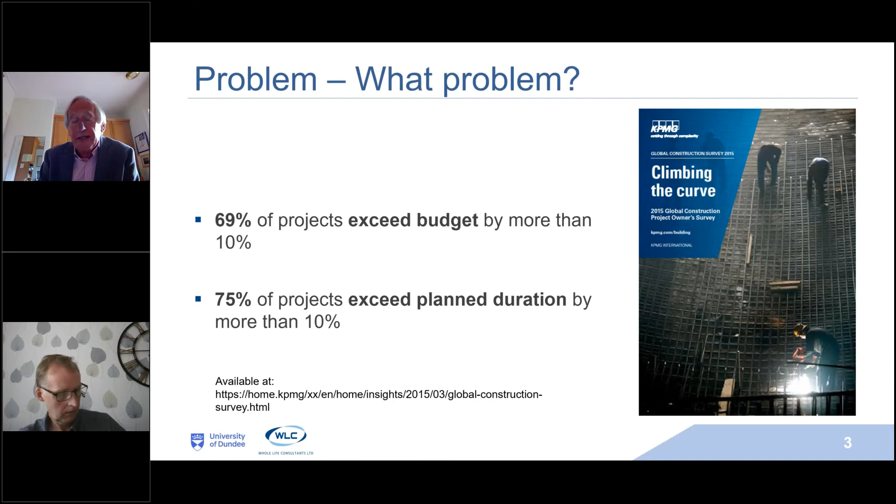Productivity has always been an issue for the construction industry, and we did some work a couple of years ago for CITB looking at productivity across a wide range of perspectives. But the one in particular that's relevant today is this graph, which shows how productivity in the construction industry, measured in terms of output, has increased over the past 30 or so years, and that average increase is 0.5% per annum. That is a tiny, tiny increase.

If we were to measure that growth in terms of GVA rather than output, then that would go up to 1% per annum. But compared with other industries, our productivity growth has been very, very small indeed. And please note that when I talk about productivity, I mean output divided by labour hours input. So it's output over input, and it's labour hours particularly that we're interested in. So a very concerning performance for government and indeed for the industry.

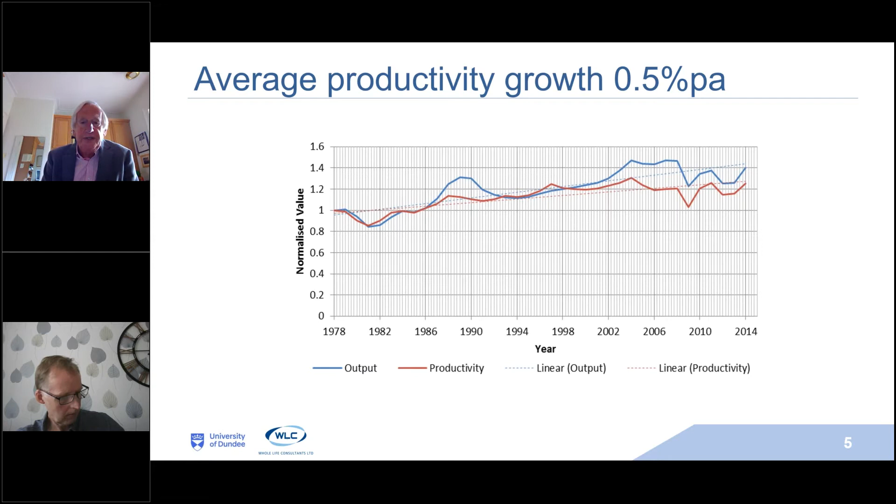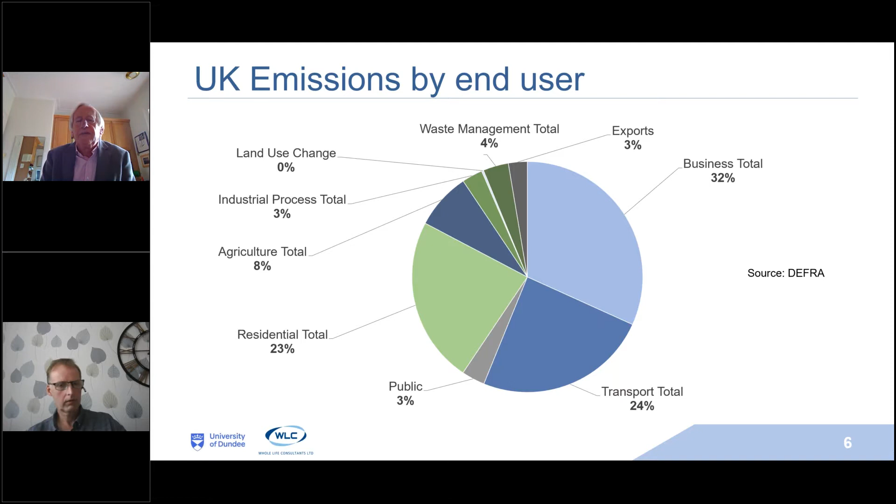And of course, as far as the environment is concerned, we contribute enormously to CO2 emissions, to greenhouse gas emissions, through the buildings that we build, through the transport networks that we build, through the energy that we encourage people to use in manufacture and living. So we have a great responsibility to the environment as well as to the economy.

And then to cap it all, along came COVID. So that itself presents challenges which a lot of people are thinking about, and I've no doubt that many of you in the audience will also have been thinking about. And I'll share some of my thoughts on how we might approach the COVID-19 issue a little later on.

So now to the Living Lab and a little bit about it. What is the Living Lab? Well, let me start off with the objectives. Living Lab is concerned with helping particularly government departments, and particularly those concerned with infrastructure, to procure on the basis of maximum whole life value.

We're all aware that it has been traditional for clients to procure on the basis of lowest minimum capital cost. And I think we're all now becoming very well aware that that is not necessarily the best criterion for procuring a construction project. So we're now looking at whole life value, and I'll talk a little later about what we mean by whole life value.

That report by KPMG indicated the difficulties that we face in predicting project performance. I won't name any names, but you will all be aware of those many large, recent projects whose predicted cost has either increased enormously over the past couple of years or has actually been exceeded.

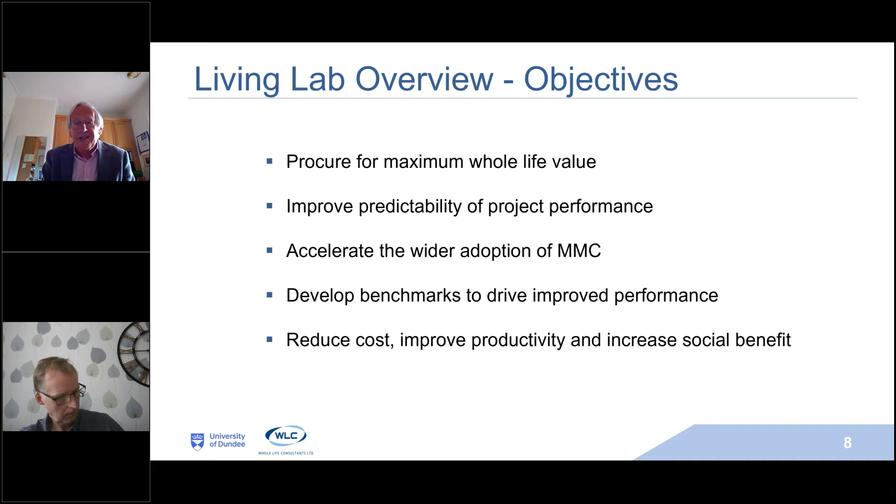The Living Lab is, as Alan mentioned, a £16 million project, funded by Innovate UK and the 27 partners that make up the Living Lab partnership. It is

a very complex project. As you can imagine, coordinating 27 partners is an incredibly challenging task, and I'm just very grateful that we have nothing to do with that. That task lies in the hands of the National Skills Academy for Rail, NSAR, and their appointed project manager, Lindberger Associates. But they will work with us together to realize those objectives which I showed on the previous slide.

Inside the Living Lab, there are 6 demonstration projects. I like to think that 4 of those projects are what we might call physical projects. They're asset type projects, and the other 2 projects are process related demonstration projects.

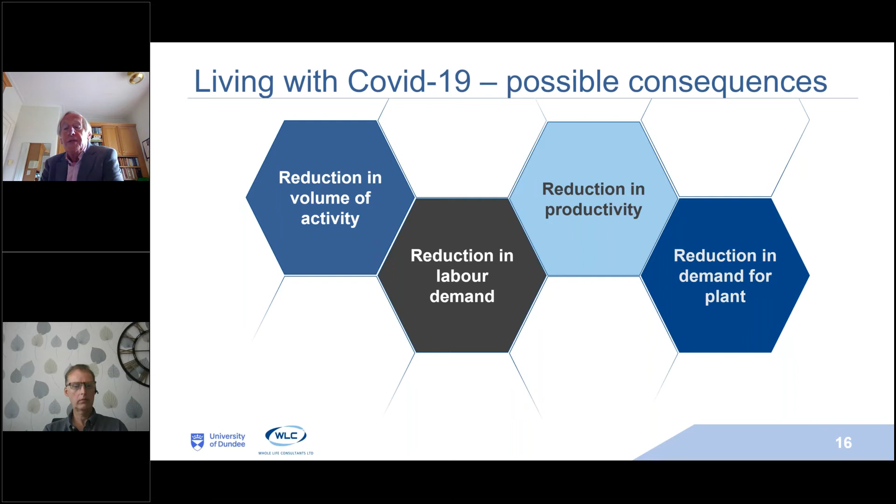There will also be a reduction as a result in the demand for site plant. There will be supply chain fragility because the supply chain has to recover from the impact of COVID, so we might find more difficulty in getting suppliers and particularly materials to site. Therefore, there will be a greater potential for delays.

Having said that there could be a reduction in productivity, there could also be the opportunity to increase productivity, and I'll explain shortly why I think that may be a very real possibility. It's also been suggested that because only the fittest will survive, the performance of the whole industry will improve significantly. Well, it would be interesting to see if that's what happens.

Moving on a little more quickly now, CLC published last week its roadmap to recovery, and what I took from that were 5 major issues. First of all, a focus on whole life social value, and I've explained how the Living Lab reflects that.

A shift to modern methods of construction, and the Living Lab takes up that challenge. Collaborative working to improve productivity, and I think there is a lot of evidence that collaborative working does indeed improve productivity. The suggestion that working hours should be extended, and that's something I want to come back to, and the suggestion that we should invest in infrastructure as a means of creating jobs, and that's also something I will come back to.

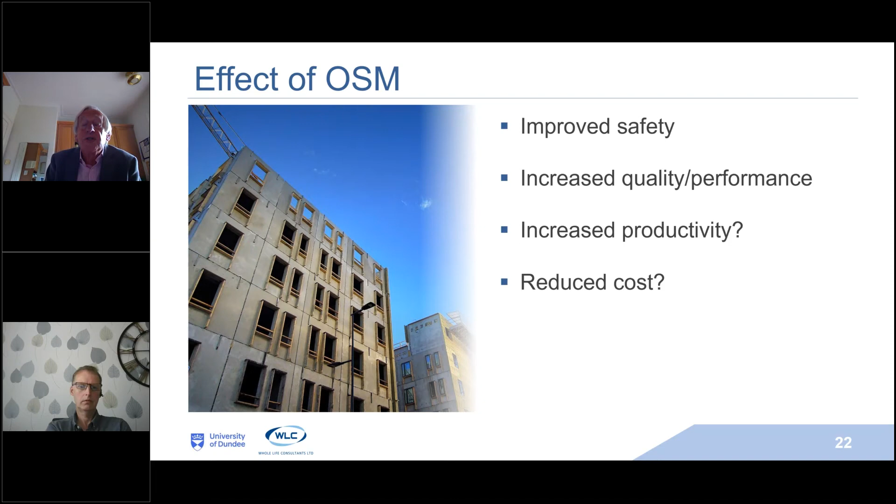So one of the things we want to do is to develop data sets to settle these discussions one way or the other. What we have done is to carry out a survey of experts in off-site manufacture to see what they thought the effect of off-site manufacture might be in terms of productivity. And what we found was that for panelized designs, they anticipated a 4% reduction in the total labor in the whole process, that is through manufacture, transport, and installation.

If we move to volumetric OSM, the thought is - and these are thoughts, not hard data - that that would result in a 14% reduction in total labor. And in both cases, there will be a major shift in skilled trades from on-site to off-site, which of course is incredibly important in terms of COVID.

But there is no hard data, as I say, and productivity is something which has been of interest to us for many years now. I think we have the opportunity to improve our productivity on construction sites brought about by the COVID pandemic.

This graph just shows the effect of interruptions on productivity on construction sites. In summary, what it shows is that if you have an interruption lasting longer than 15 minutes, you will suffer a loss in productivity in the time that remains of something close to 30%. Interruptions are major causes of loss of productivity on construction sites.

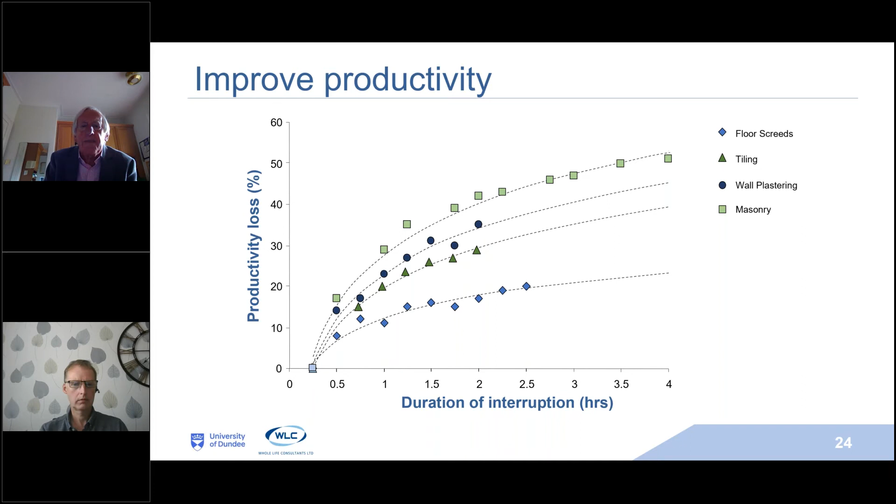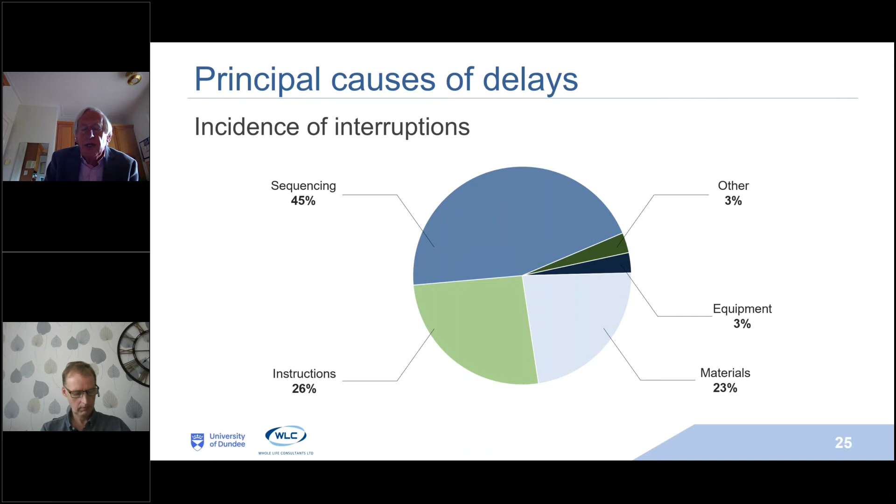The major causes of interruptions are sequencing problems, waiting for information, and waiting for materials. I think we need to turn our minds to how we minimize those interruptions with a view to maximizing productivity on our construction sites.

Now, CLC has suggested that we should extend our working hours, but I want to draw your attention to a piece of work done in the States - it has to be said, in the last century, I think about the 1980s, and because I'm working from home I can't get into the office to look up the reference - but it was a piece of work undertaken with a precast concrete manufacturer who was manufacturing pipes, and all of a sudden he got an increased order which required him to increase his output by 50%.

So what he did was increase the working hours in his factory from 40 hours a week to 60 hours a week. Sure enough, in the first week, output increased, as you might expect, by 50%. But interestingly, over the next 10 weeks, the output fell back to what it used to be when working a 40-hour week, even though he was still working a 60-hour week.

It was suggested that the reason for that was because people have in their minds a fixed view of what constitutes a reasonable output for a week's work.

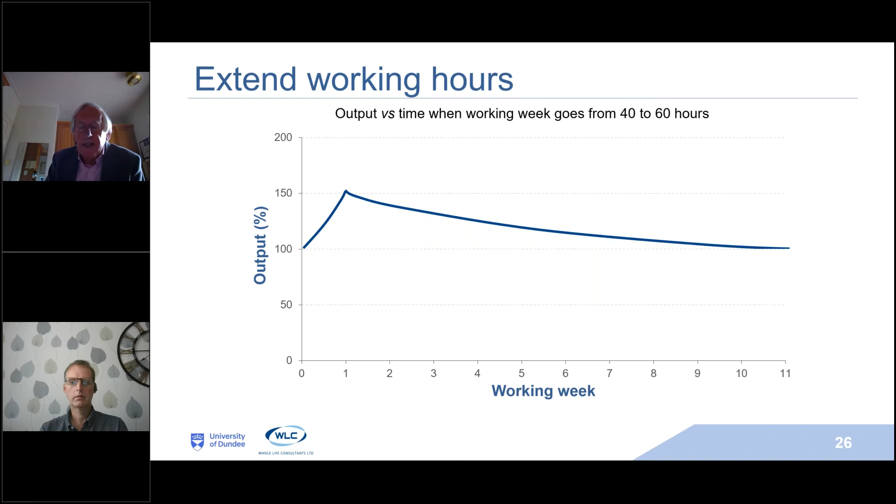There's been a lot of work done in America, and this graph is a very crude approximation to the average of everything published in the States about the effect of prolonged overtime working on productivity. In very crude terms, for every increase in your working week beyond 40 hours, you will suffer a 1% loss in productivity. So if you work an 80-hour week, you will suffer a loss in productivity of 40%.

So I'm not sure that extending working hours is actually what we need to do post-COVID, and I'll suggest in a moment what I think might be a better strategy.

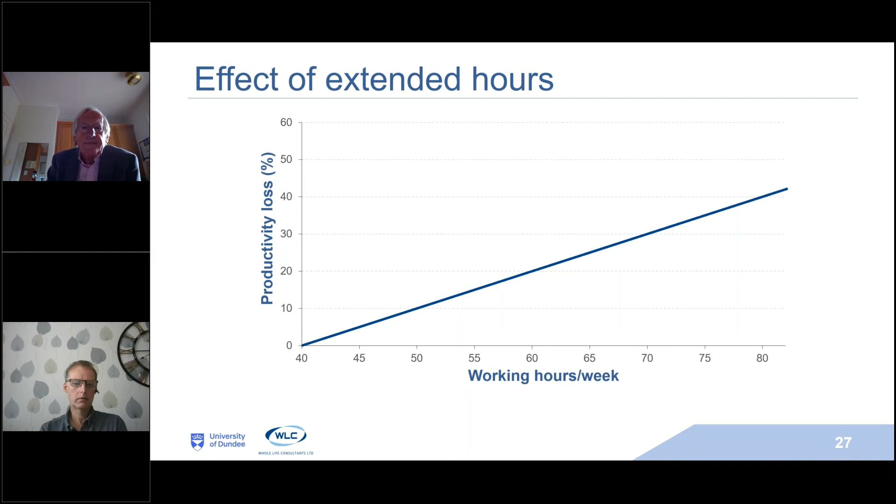CLC also suggested that we should invest in infrastructure. Now, it may well be that investing in infrastructure provides us with most bang for our buck if we're thinking in terms of whole life social value. I think that is a very strong possibility.

However, if we're thinking about job creation, I think we need to think slightly differently, because - and I can't give you the figures, they're confidential, so I've normalized them to 100 for infrastructure - if, for instance, it took 100 person years per £1 million worth of output to create a piece of infrastructure, in new housing you will get 160 person years for the same £1 million, and in housing R&M you get 210 person years for your £1 million. Now, those are not real person years, but they are normalized to infrastructure as being 100.

So if you really want to improve job prospects, then you would go for housing R&M in preference to infrastructure. Having said that, if you were going for whole life value, you might well go for infrastructure rather than housing R&M.

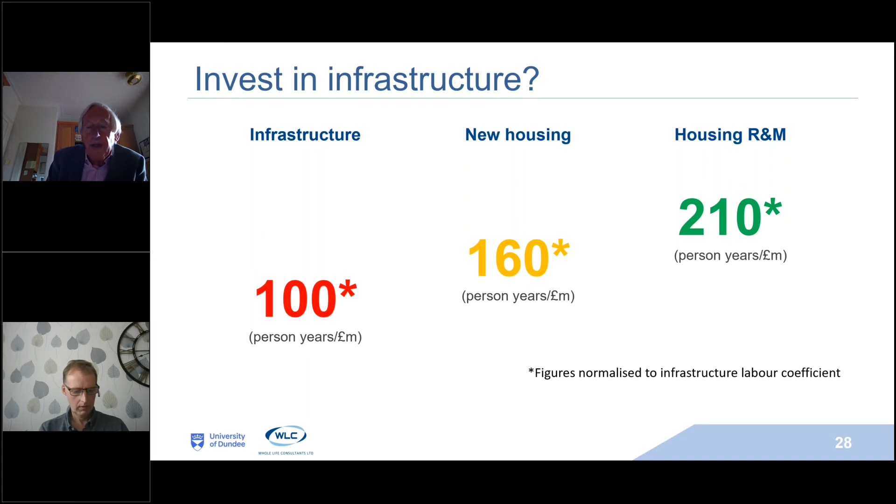So here we are, we have a crisis, and there was an excellent report published in 2009 by Constructing Excellence, entitled Never Waste a Good Crisis. It was a really good report, but I think we've got another opportunity not to waste a good crisis here, because we have the chance to rethink what we do in terms of improving the performance of the construction industry and the quality of provision to our clients.

I would suggest that if we want to increase more jobs and employment, then we should look at investing in housing and R&M, as well as investing in infrastructure. I think it's clear that we need to shift to off-site manufacture for all the reasons I've already suggested.

I think there is very good reason for moving towards more collaborative planning. Collaborative planning is a lean technique which brings together everybody concerned with the outcome of a project, to make sure everyone understands the challenges and knows how to overcome them. So I think that's essential.

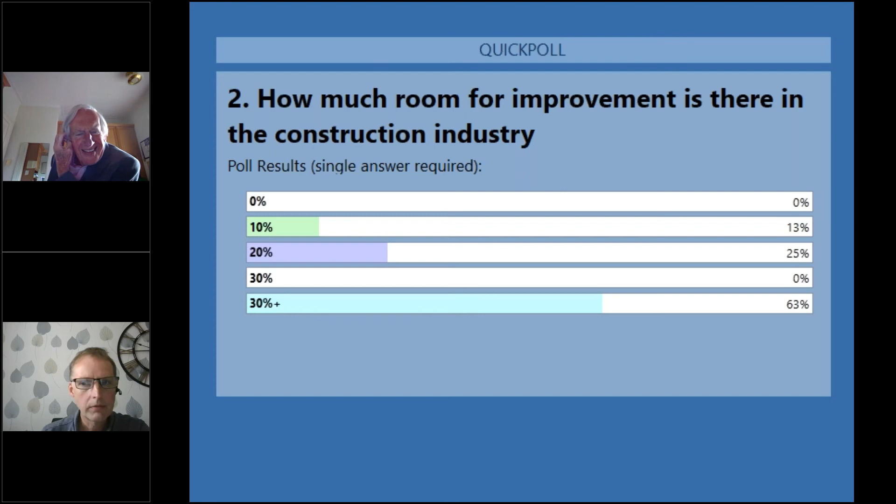Oh, wow. Yeah. Oh, how interesting. So vast majority at the 30+ there. Yeah, very interesting. I'll just turn over to go over to questions now, Malcolm.

So the question I've got here, and actually you mentioned this in some ways, but someone was reading your mind: if productivity reduces with increased hours, would reduced hours not increase productivity? You did mention that, but what's your thoughts on it, or would you like to expand?

Well, one of the issues for all of us is having reliable data, and I don't have any data which would suggest that productivity would increase with reduced hours, but I have a very strong gut sensation that it would, in light of everything that I read about and everything that I experience when we increase hours. Just think of yourself: if you're digging your garden for an hour, you'll actually be much more productive than if you dig your garden for 2 hours, because you get less tired, amongst other things. So I think there is a very strong possibility that reducing working hours would increase productivity, and I'd dearly love to see somebody test it.